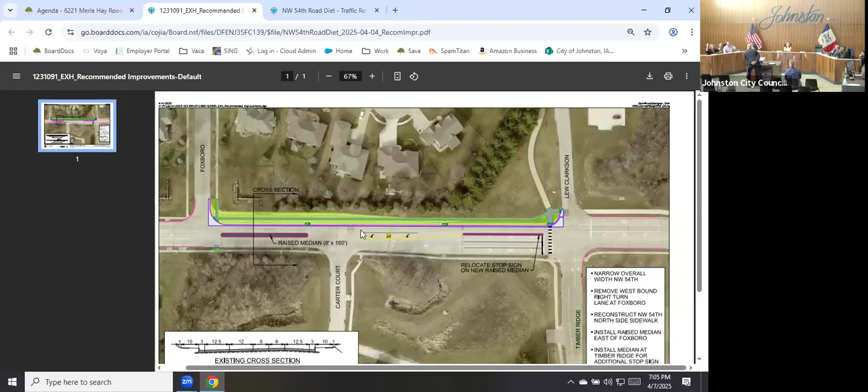Yeah, without a doubt, as a traffic engineer, any fixed object out there, anytime you have fixed objects along a corridor that are pushed in closer versus set way back, it starts to give people that feeling of it closing in on them, and they slow down. It's with the general assumption that most of the population drives an appropriate speed, and that's how it tends to work at times. So whether it's trees, utility poles, street lights, different things can have that impact. This corridor, in general, has a lot of width to it for the nature of the roadway.

I apologize, Mayor, I know we're over time, but I want to ask this question. The median you've proposed here, 8 foot wide by 160 feet long, doesn't say anywhere what that median is made of, whether it's concrete or grass. What is your opinion on medians like that?

8 foot is not generous. 8 foot is where we would put a tree between the back of curb and a sidewalk, but it's not generous.

How do you feel though those medians should be? Should they be more concrete in a concrete world, or should they be grass? I'm sorry, I'm so transparent.

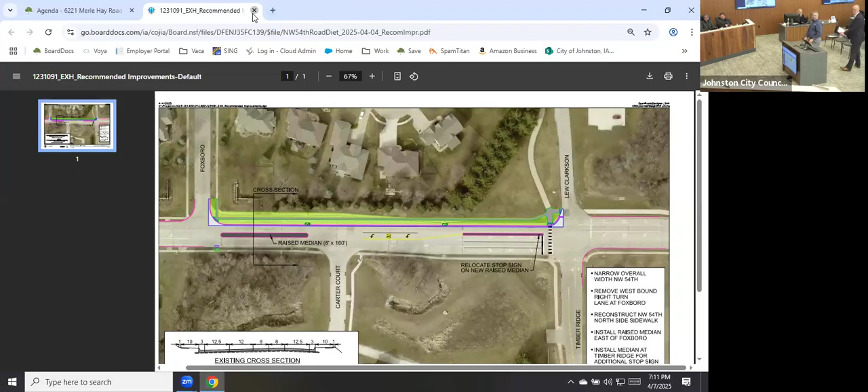Thank you, Mark, one more thing. I would recommend that if we are going to be proposing street trees, that it ends up being a line item in your road estimate. Thank you.

Okay, we have one more item under the work session, and that is a presentation on the streetscape master plan, framework concepts, and public outreach. Hopefully we can get this done in about 10 minutes. We will try.

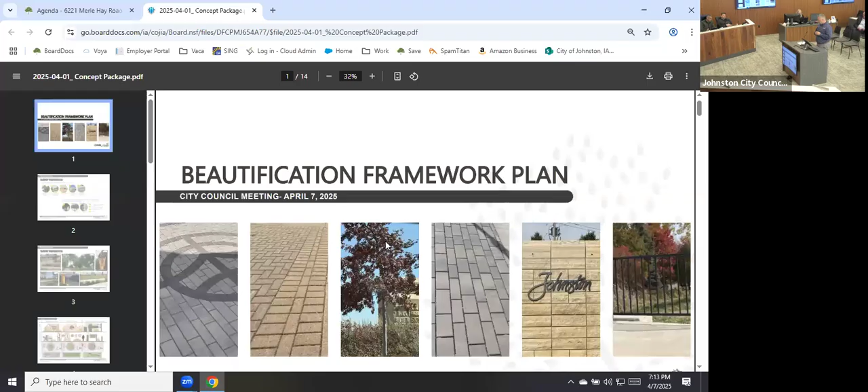City staff continues to work with Bolton and Menk on a streetscape master plan, which will identify areas to provide enhancements to intersections and treatments to street corridors. These would be implemented in future roadway projects and could also be retrofit into existing roadway corridors. Nate Weidel will provide a brief update on the survey results, work performed, and information gathered up to this point. Concepts were shared with the Streetscape Working Committee, which provided feedback on each, resulting in a combination of concepts. On April 1st, the consultant and city communications staff deployed an update to residents on concepts via a short public video, with an opportunity for the public to provide feedback at the end. So with that, I'll turn it over to Nate.

All right, good evening. I'll move through this about as quickly as I can without being too short. So just a couple of things here, some design updates for the beautification framework plan.

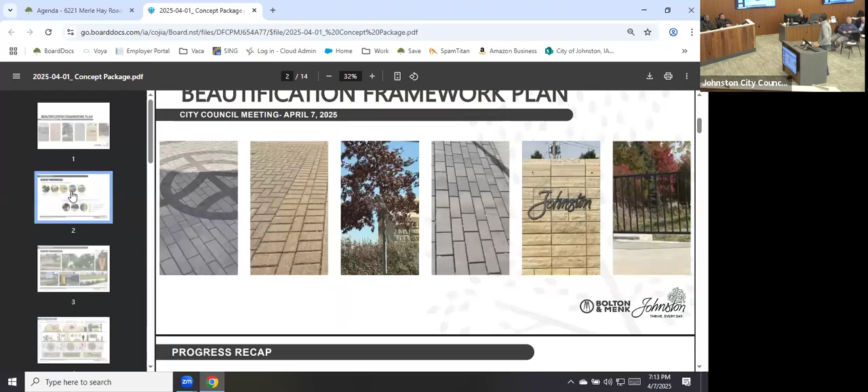It's not really you, Nate. What's that? It's not really you controlling it.

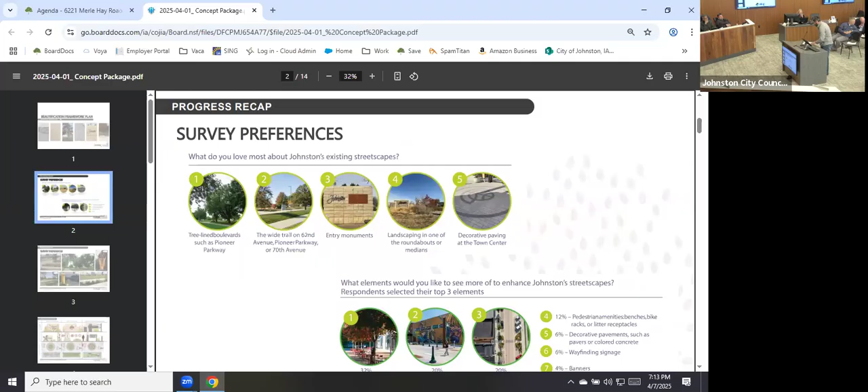Oh, amazing. Okay, cool. So just a couple of really brief recaps on a public survey that was issued back in January. I wanted to highlight a couple of questions here that respondents gave some good feedback on.

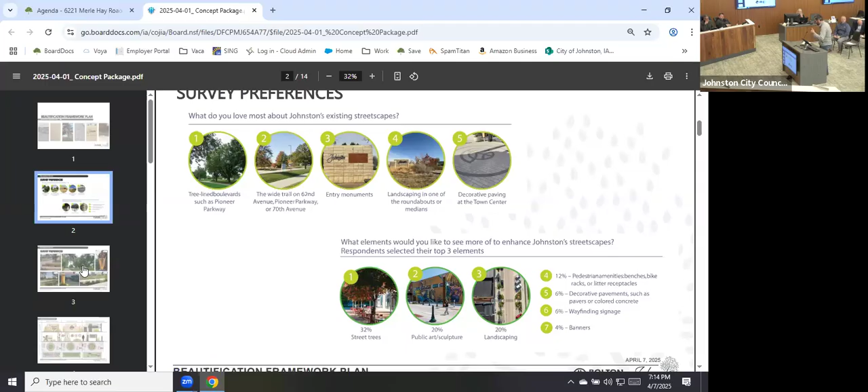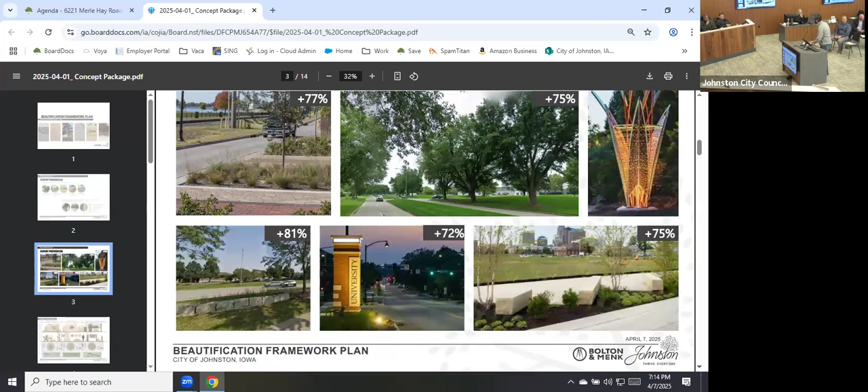We heard a lot about tree-lined boulevards, entry monuments, and trails on several of Johnston's primary streets as some of the most preferred elements of Johnston's existing streetscapes. Elements that the public would want to see more of are 32% street trees, 20% public art and sculpture, and 20% landscaping. You'll see as we move through these slides our focus on those items. Here we've got some images from the public survey that people were really drawn to, highlighting things like monumentation, public art, accent lighting, street trees, and landscaping.

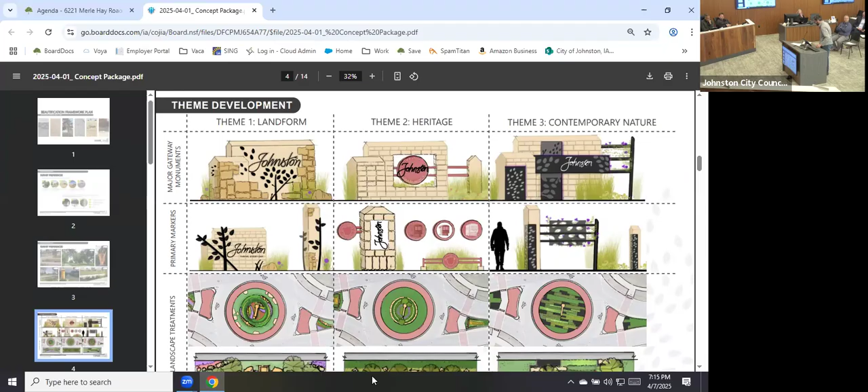For the committee, we explored three different themes of different form and different types of monumentation, as well as landscape enhancements in roundabouts and medians.

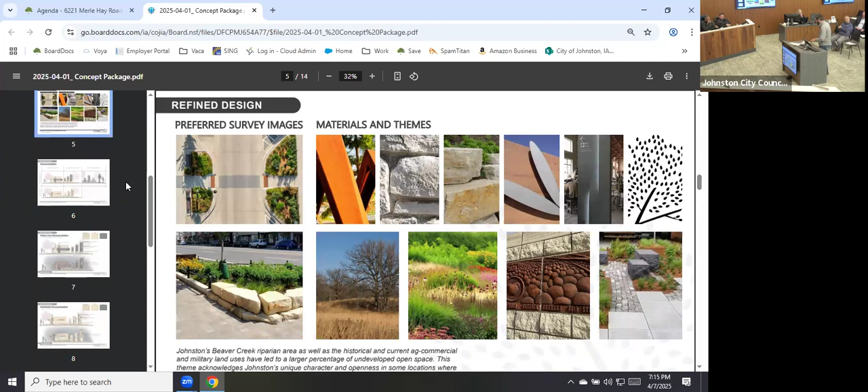From there, we arrived at what we're calling a preferred or refined design. This is really tied to Johnston's historical connection to the landscape, as well as some of the open areas of Johnston, ag commercial uses, and military land use areas that have left a pretty open character in parts of Johnston. But we also have an urban fabric that lays right over the top of that landscape, so you'll start to see materials and themes pull those things together — things like gently rolling topography, geology, and native plant communities, as well as some urban core features.

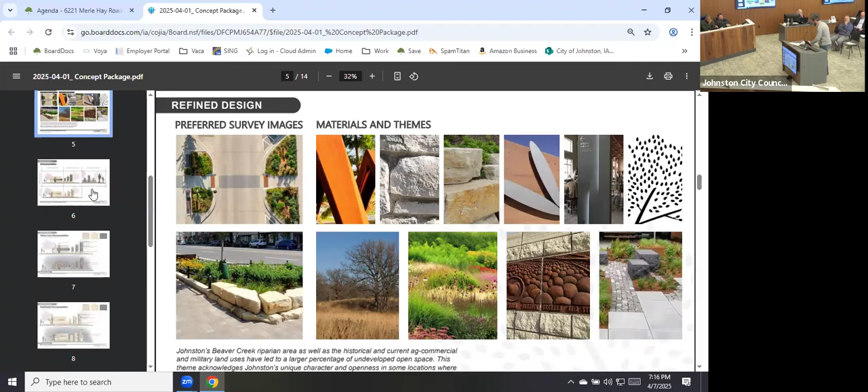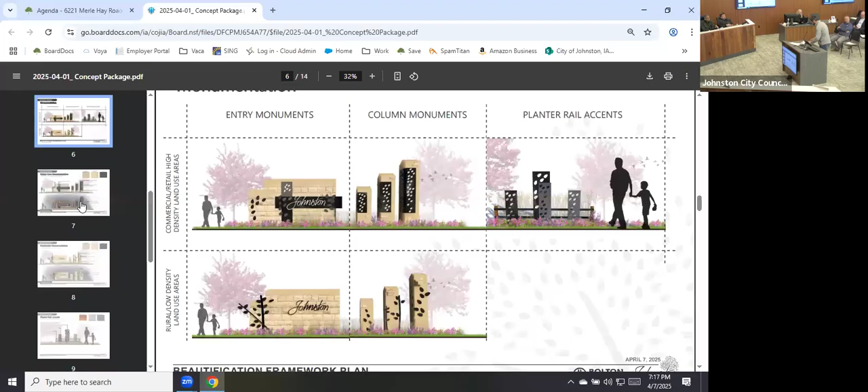Moving into the urban core monumentation more specifically, these reuse or actually use monumentation that currently exists in Johnston. That was one of the things we heard in the survey — that the monumentation within Johnston right now is a pleasing aspect of the community that people really wanted to preserve. So really what we're doing here is building off of that, building a contemporary theme based off the contemporary nature and landform items.

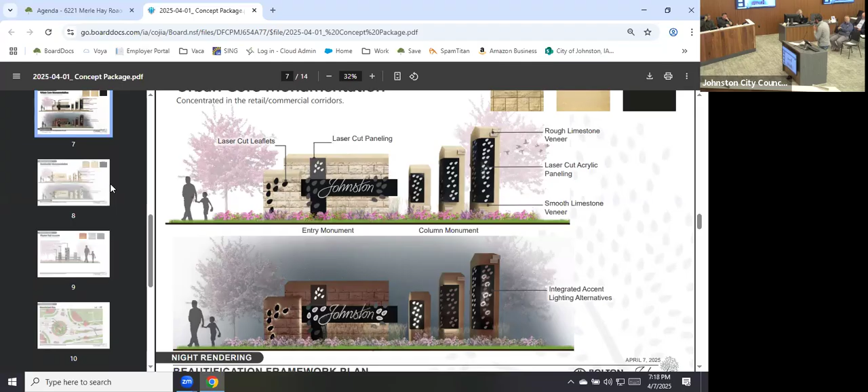The bottom image here shows how some accent lighting could be worked into this monumentation. I would visualize these as small cabinet type sign materials so that you can get some interior lighting and really create some nice visual interest at night.

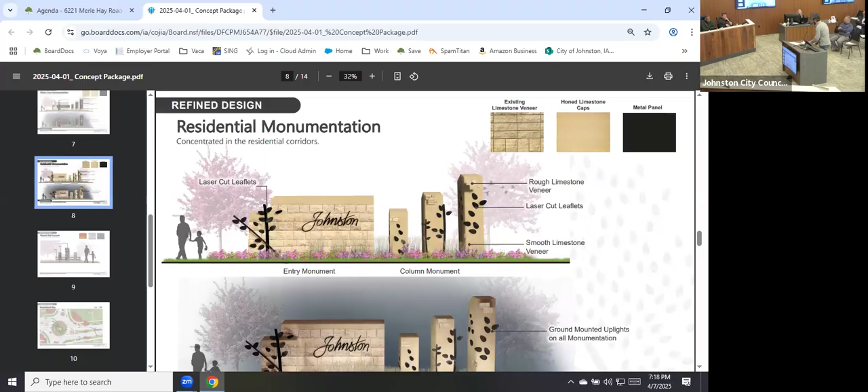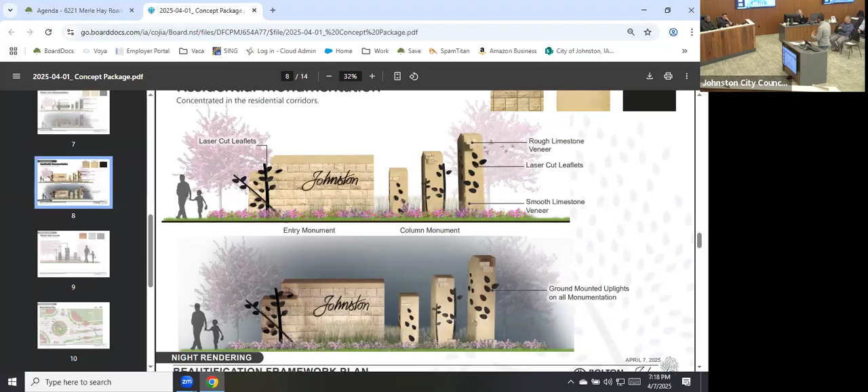Moving on to the lighter touch, the residential monumentation — similar in nature in that we're adding some painted metal items to the front of the sign or the monumentation to add some interest. But on the bottom, the lighting is really just taking on a character of ground lighting up on the sign, just a nice gentle wash.

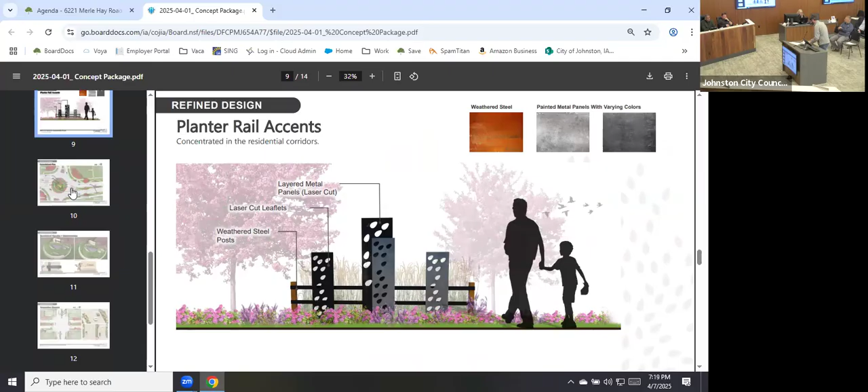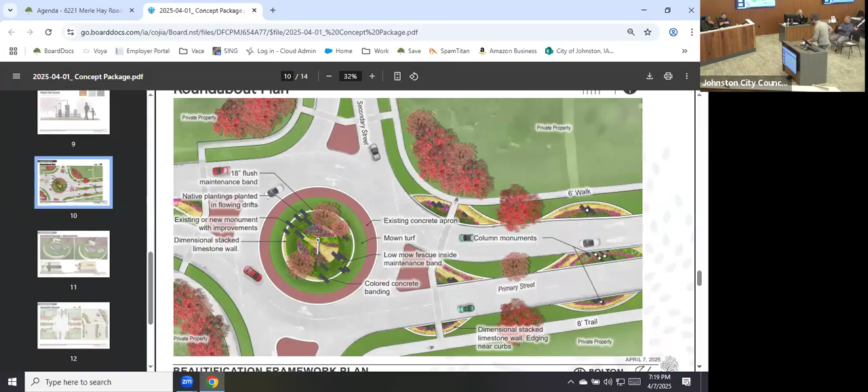Okay, so this is a roundabout plan layout. This would be a typical roundabout, not necessarily tied to any one street corridor. We've labeled a primary street running left to right, and a secondary street north to south. On these primary streets — streets that may have higher commercial land use or other things we want to feature, like entries into town — we would start to pull some of the roundabout landscape enhancements out into the median of that primary street. So what I want to highlight from a design standpoint is really just the juxtaposition of the urban fabric laying over the landform shapes and forms here.

So the landscape is kind of flowing through the site here, and then we have these colored concrete bands that lay over the top. Other things here include a mix of materials using landscape as well as natural limestone materials and colored concrete.

And the monumentation that we shared earlier, we're showing that as you approach a roundabout intersection like this, we can start to employ some of those column monument markers as you're entering into the roundabout.

One of the key features of all of these plans is that we are using 18-inch concrete banding, especially at the back of the curb. That'll be important for maintenance purposes, just to make sure there's a nice clean edge there.

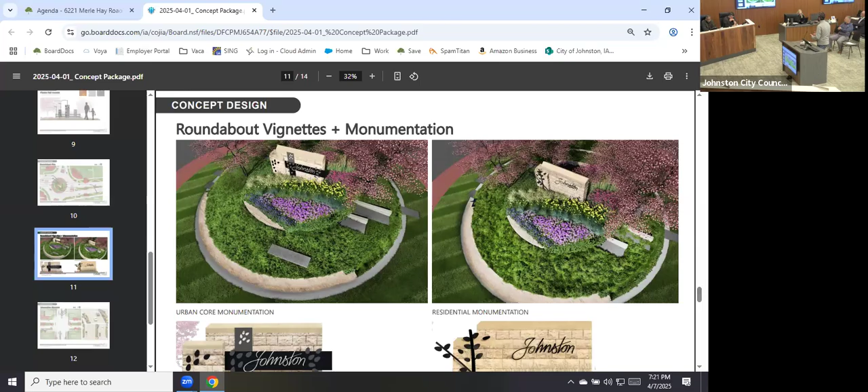That's it on that plan, so we can move on. Some visualization here of what the center of these roundabouts would start to look like as we lay that concrete banding over the top of the landform style planting.

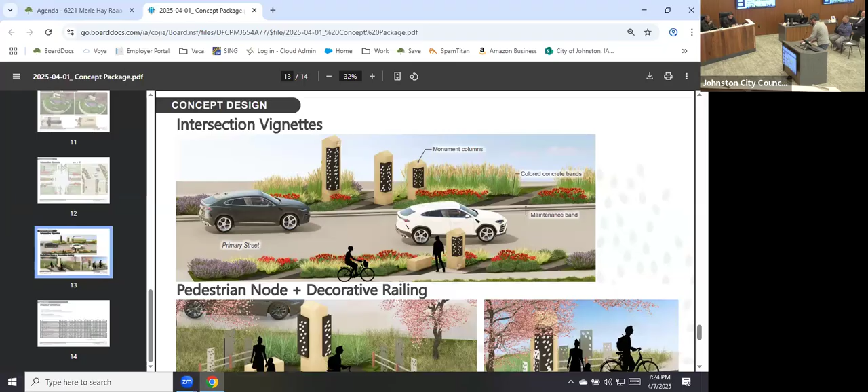Moving on from there, we have some more visualization images again of those column monuments, and you can see the colored concrete banding at an angle there going through the intersection or through the median.

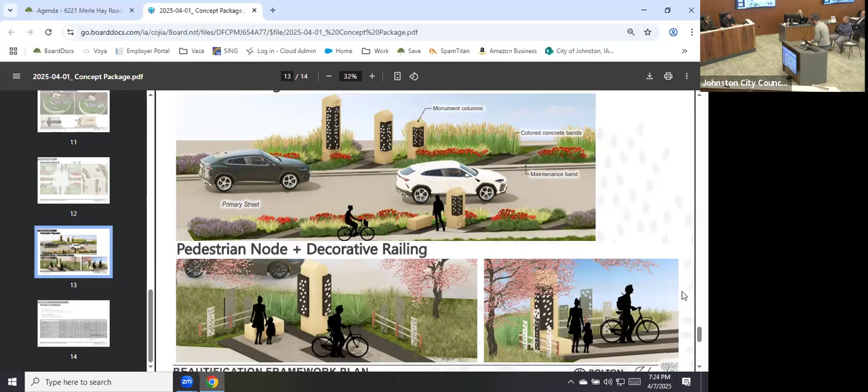And then on the bottom, we have a couple of images of the pedestrian nodes that I mentioned earlier, just how we can start to get some seating areas and those planter rails, just to create a really nice environment for pedestrians to be in, which contributes to the overall walkability of the community, which then ties back to the survey responses that we got.

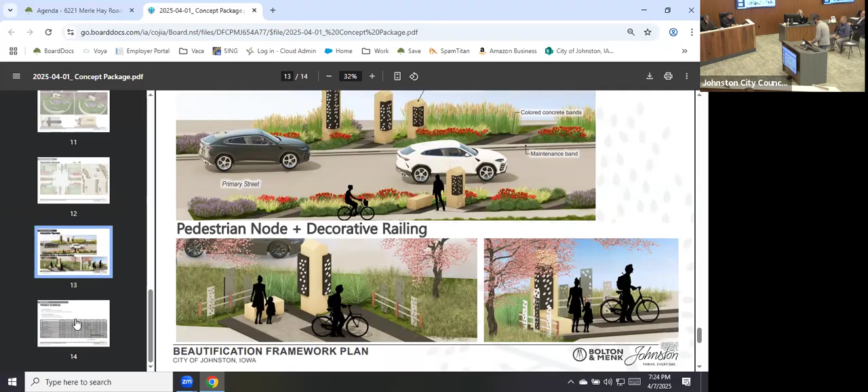Okay, so then moving from there, just a little bit about project schedule and next steps.

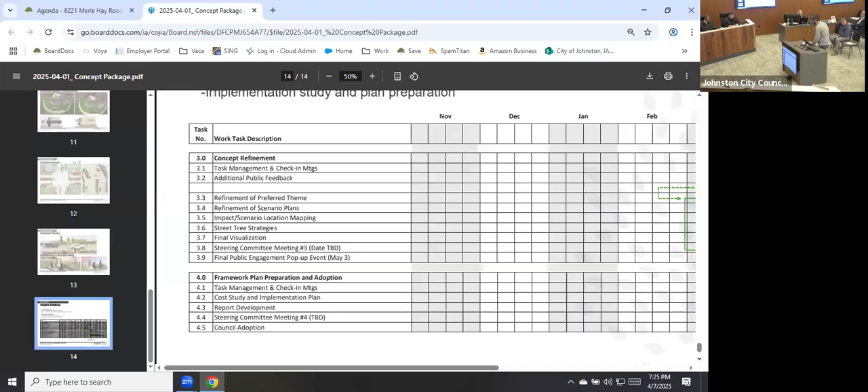Our next steering committee meeting is on April 15th, which will be our third steering committee meeting. We also have an interactive update out to the public right now, on the city webpage and advertised in the Johnston Living magazine. That gives respondents a chance to give us feedback on how we're doing, and it will close on April 22nd, so we'll get an idea of how the public thinks we're doing.

We also have a public engagement pop-up event on May 3rd, which will give members of the public a chance to stop by and see what we're doing.

As far as key next steps on work approach, we're going to look at street tree implementation strategies. That gets into some of the policy we discussed earlier, but also important considerations like utilities and how much space is available in a median or streetscape to add trees. We'll also look at prioritization of certain project options with the steering committee, and then look at costs as well. We're tracking for about a June completion.

Got through it. Any questions? Does anyone else have questions for Nathan?

One question I have, which may be as much for Nathan—I remember when we were talking about one of these studies, we were going to put an emphasis on Merle Hay Road. Is that this study or a different study?

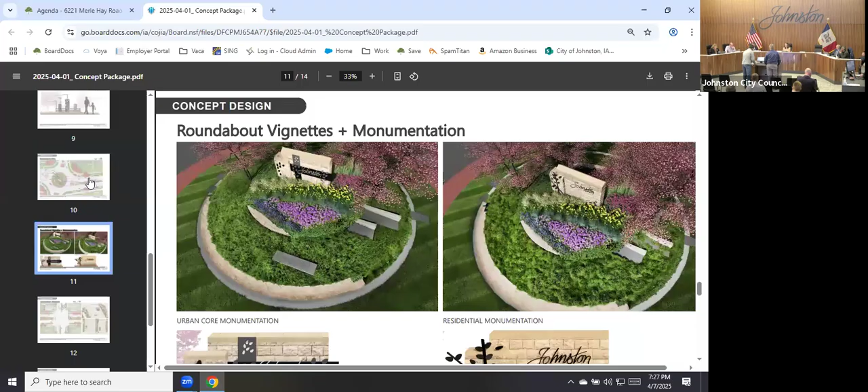I think it's really amazing looking, and I especially like the focus on the roundabouts. My one question is, looking at this concept design roundabout plan, it looks like we're doing a lot of planting and landscape work that I presume maintenance has to be accounted for. I hope as part of our cost plans—I have a little concern that we roll something out, everybody looks at it and says it looks amazing, let's do it, and we don't take into account the significant maintenance, time, effort and labor it's going to require to keep it looking this good.

I heard a mention of costs, so I want to make sure you're incorporating both the expectations on labor and staffing needs, and also maintenance costs, because we know we're facing an environment where our ability to invest in those things is getting more constrained, not more robust. I want to make sure we're not raising expectations at a point when we're not able to fulfill them, because this looks like a pretty significant maintenance commitment for Public Works or somebody else to maintain. That's a little anxiety I have about some of the stuff once we get outside of the roundabout circles.

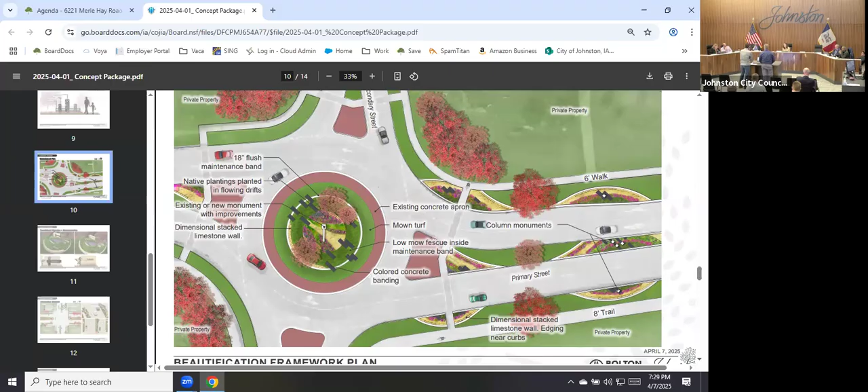Yes, we have directed the consultant to keep in mind maintenance cost and time, so that has been a direction we've given. We've also been working with Jeff Hubbard, the Parks Director, on that, and he's had some input as well. We'll continue to move forward and keep that in consideration. We understand maintenance takes a lot of time and staff, so we want to create something that is low maintenance but still looks attractive to citizens.

The other thing I can share quickly is that a lot of those circles involve low-mow fescues, which is really just a seeded area that you mow once or twice a year. It has a nice fuzzy texture and visually appears as part of the perennials and flowering landscape, but it's a different maintenance regime.

Okay, thank you. Any other questions? Thank you, thank you, thanks.